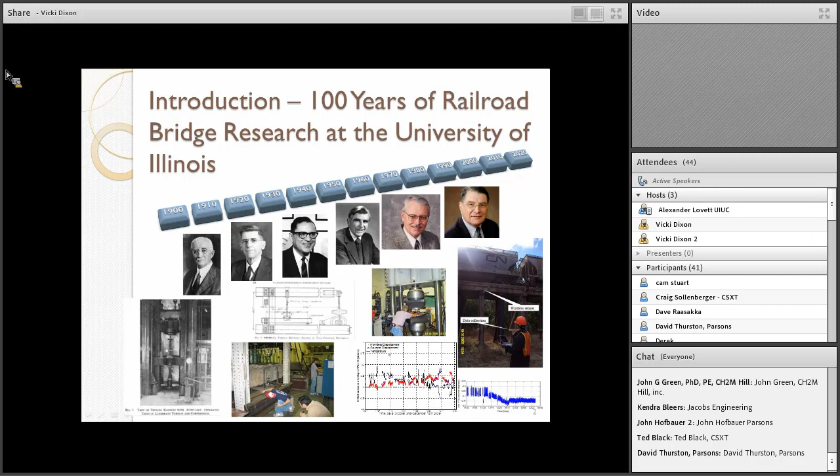Even today, we have a very strong group of 13 or 14 faculty in the structural engineering and mechanics program here at the University of Illinois in civil and environmental engineering, and probably half or more of these individuals have been directly involved in railroad research in one way or another. More broadly, the coursework and research they conduct may or may not always directly affect railroads and railroad bridges, but I think what students learn has many applications to that field.

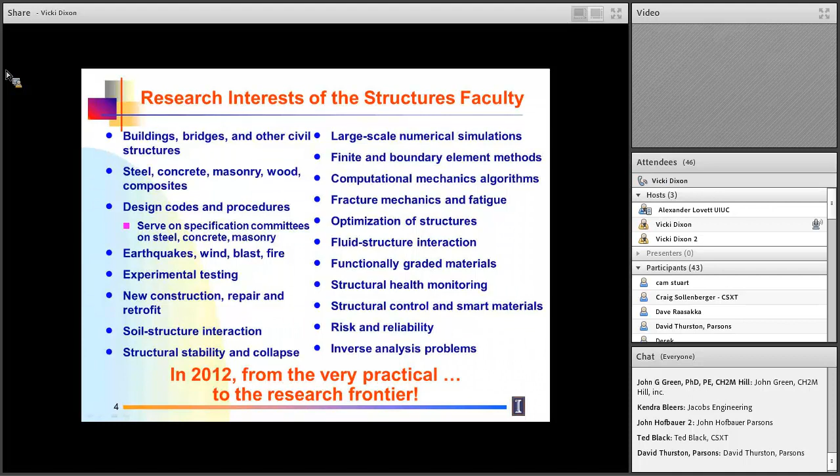So to briefly keep this tangent going, I wanted to give a quick listing of some broad research interests of our structural engineering and mechanics faculty here in the present day of 2012, ranging from the very practical, maybe in the upper left, things you've all heard of, to the research frontier down in the lower right, where you hear about things like risk and reliability, structural health monitoring, fancy new materials that are emerging, et cetera.

So to complete this introduction related to structural engineering here at Illinois and how it has connected to the railroad engineering program and railroad-related research, I'm just listing here a handful of recent examples of UIUC CEE structures faculty having involvement in railroad-related research.

A few years ago, Professor Dan Kuchma, who's here in the audience today, did some testing for strength evaluation of aging concrete railroad deck beams. Right now, Professor Larry Fahnestock is involved in a project on improved bolted connections for special trackwork with a focus on crossing diamonds. Professor Bill Spencer is here as well, and has great expertise in wireless structural health monitoring, with a particular example being the so-called government bridge.

Professor Bassem Andrawes, along with Dan Kuchma, is working with a big team on improved concrete railroad tie design and performance. And then I'm going to talk a little bit today about one narrow slice of bridge performance assessment using simplified field monitoring. That is in addition to some construction materials and other faculty working on topics closely related to railroad bridges and closely aligned with structural engineering—John Popovics and David Lange as well.

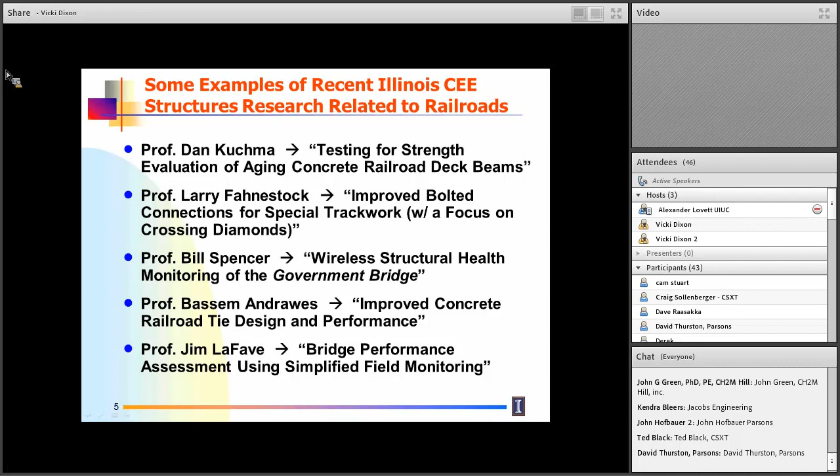So in terms of the slightly more narrow focus topic for today, bridge performance assessment using simplified field monitoring, the general background is that there's an ongoing need for repair and replacement of railroad bridges, and there's an issue that there's limited access to them during actual traffic, so it may be challenging to measure year-to-year degradation.

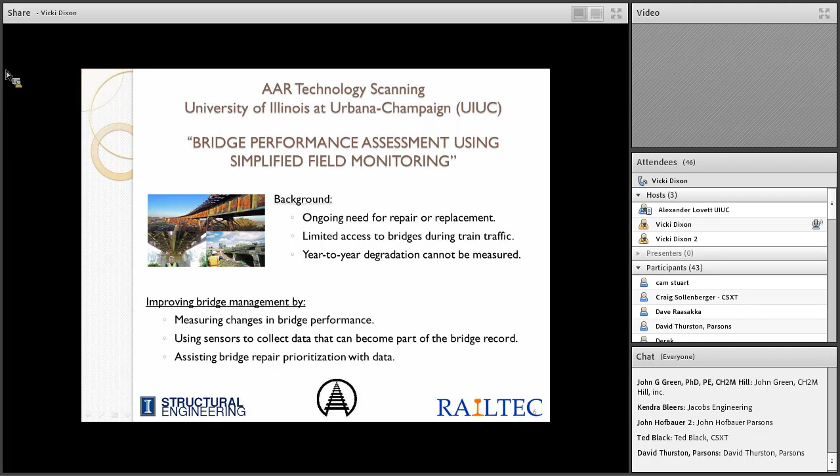Perhaps bridge management could be improved by measuring changes in bridge performance using some sort of sensors, wired or maybe even ultimately wireless, to collect data that can become part of the bridge record that could assist in some way in bridge repair prioritization under the general umbrella idea of performance assessment for maintenance.

So what I want to talk about today is, first of all, for a few minutes, some important preliminary work that was done to get a better handle on research needs within the railroad industry related to bridges and structures in general. After that, I'll briefly talk about the monitoring approach.

One field excursion where on a timber trestle some displacement measurements were made with the help of folks from CN, and also some acceleration measurements were made, and in tandem, as I indicated earlier, some folks from the Smart Structures Technology Lab here also were making wireless measurements. I'll try to describe in general what that research has shown to date and where it might go from there.

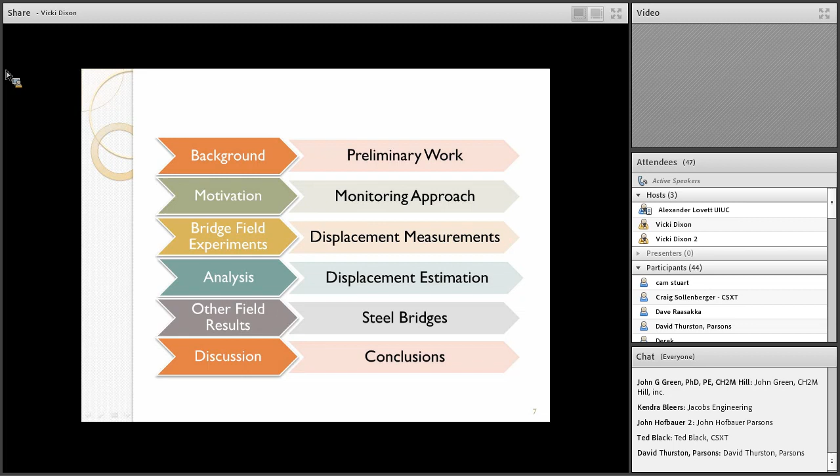So in terms of the preliminary work, there's two things I want to talk about. One is a survey-based study that was conducted over the last couple years, and then the second is an ongoing effort toward what I call railroad bridge classification.

The survey-based study was basically something conducted over roughly the last couple of years to try to determine, for railroad structural engineering, what are the current research needs. The effort was focused here at the University of Illinois. I mentioned Fernando earlier—he and I spearheaded it, with him doing most of the legwork, and the goal was to determine current research interests and needs related specifically to railroad bridges and then more broadly to structural engineering in general.

The motivation for doing this was that about 25 years ago there had been a national workshop on a related topic held right here on campus that resulted in a white paper type document identifying the most important research topics of that day regarding railroad bridges and structural engineering. Many folks have noted that the amount of related research activity in the era leading up to then was trailing off with respect to railroad bridges, and it picked up a bit in the era after that.

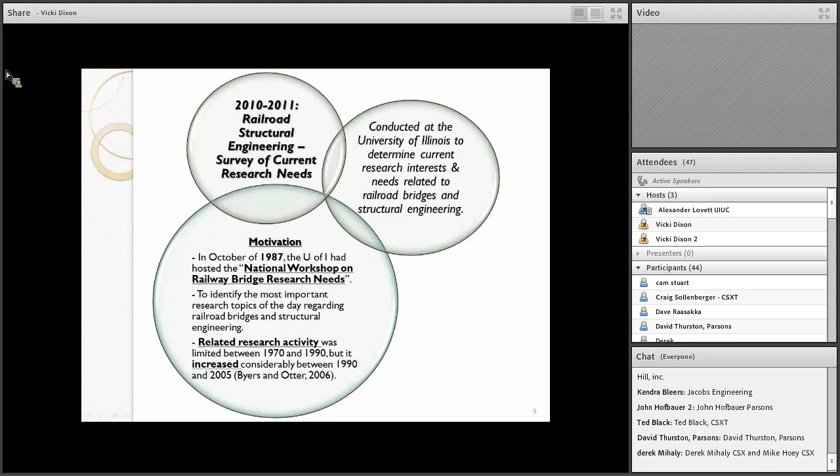So the idea was that as a minimum objective, if one could conduct some version of a survey that might be a surrogate for an actual workshop, it could help prioritize the current railroad bridge structural engineering research topics as given by members of the community across North America. Since it had been quite some time since the previous survey or workshop, this could be very beneficial to the profession.

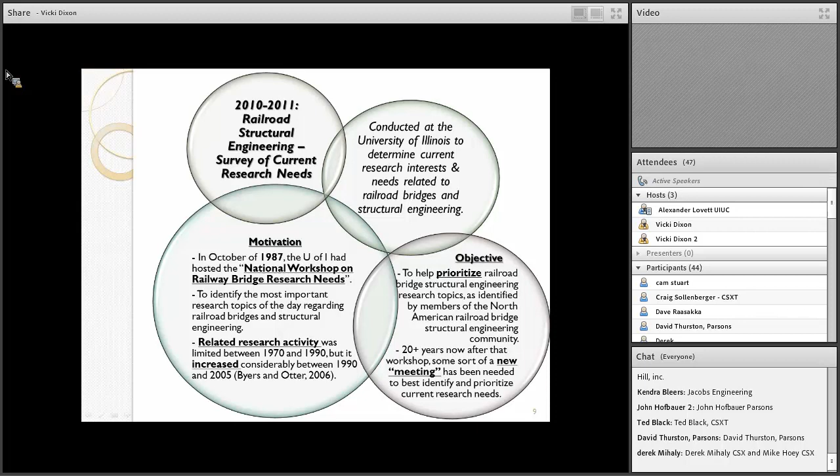In terms of the survey methodology, just to give a brief idea of what was done: the project started with Fernando and me talking to various people in the industry to come up with appropriate open-ended questions to ask, and also topics to survey about.

These were emailed to various interviewees with questions and topics, followed up with phone interviews. Along the way, some additional topics were added to the initial list, interviews were continued, and follow-ups were completed with folks who had been talked to early in the process before the full list of topics was complete. Finally, there were meetings in person, if possible, to discuss matters further.

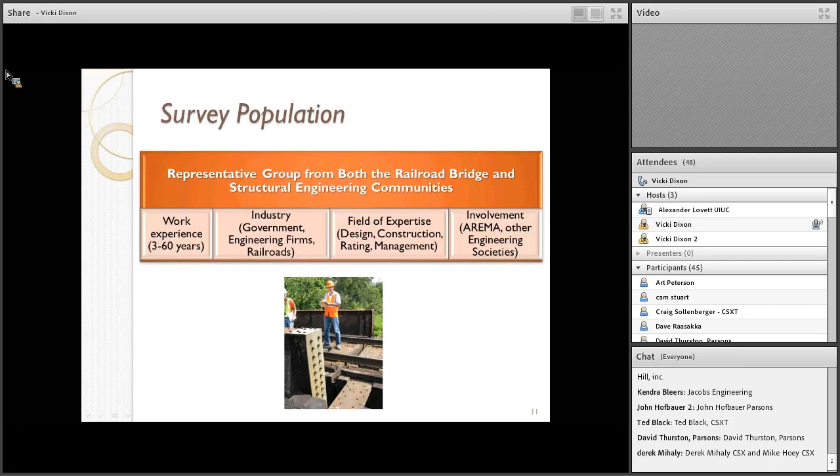On the side, some literature reviews, meetings with other experts, etc., were also conducted. In terms of the population, this was not a large survey in total number of people—it was targeted at something on the order of 16 primary participants, but they represented a wide range of experience in the railroad industry, representation of different organizations related to the railroad industry, fields of expertise, and other professional committee involvements.

What came out of this survey were 22 main research topics, including topics originally proposed by us when we started the survey, some new topics collected along the way, and a handful more from the related literature review. All of this can be found in a Newmark Structural Engineering Laboratory Report Series document dated just last month that goes into great detail summarizing all aspects of this survey.

Even though there were 22 main topics collected, about half a dozen of them seemed to be the current top research topics from the overall survey. Those were also summarized in more cursory form in a short RT&S magazine article published roughly a year ago.

So out of the current survey from the last couple of years: some means to make accurate deflection measurements on in-service railroad bridges, along with concerns about high-speed train effects on bridges and structures, long-span bridges that might be needed to replace existing aging bridges over major river crossings, issues about approaches both from the bridge and non-bridge perspective, longitudinal force issues, and concerns about new design loads.

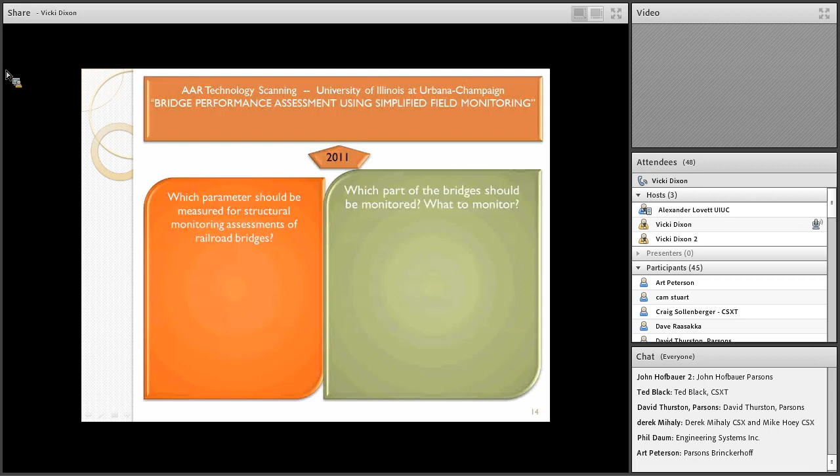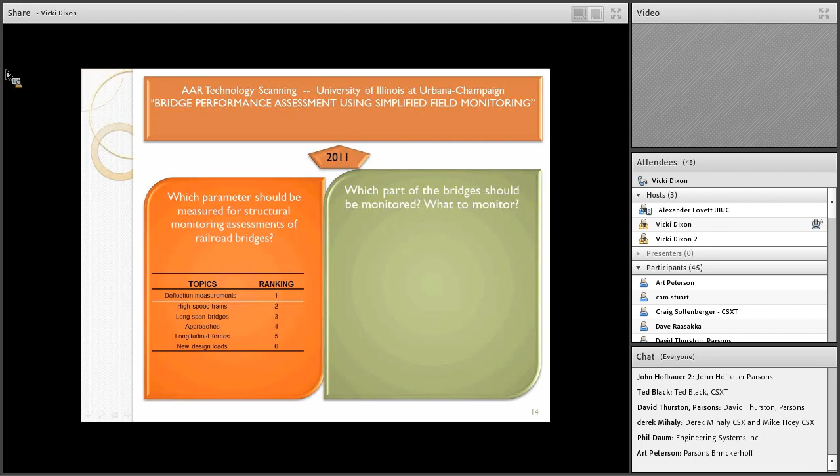So with the survey sort of in place and in mind, the thinking going forward is that one parameter that might be of interest to folks in the railroad field with respect to assessing or monitoring bridge structures could be lateral deflection. That focused the ongoing research a little bit further.

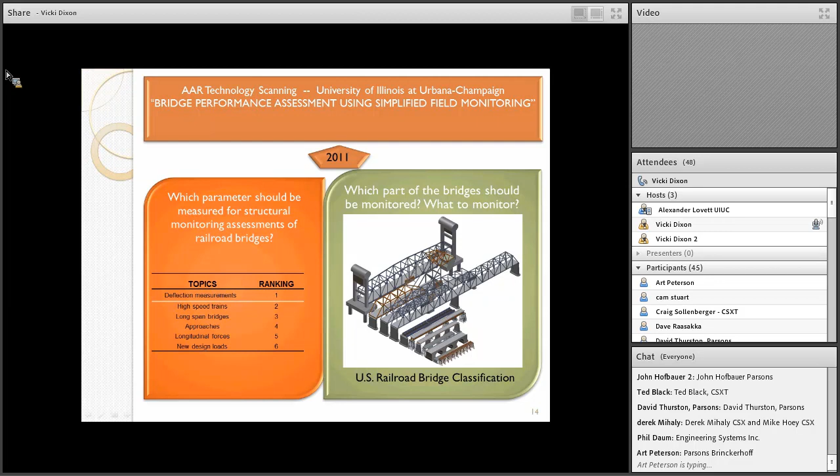Along the way, one other activity I want to briefly describe was also conducted: an effort to create a bridge classification of typical railroad bridges in North America, to better understand the full collection of bridges, and to get traction toward understanding what part of bridges should be monitored depending on bridge type.

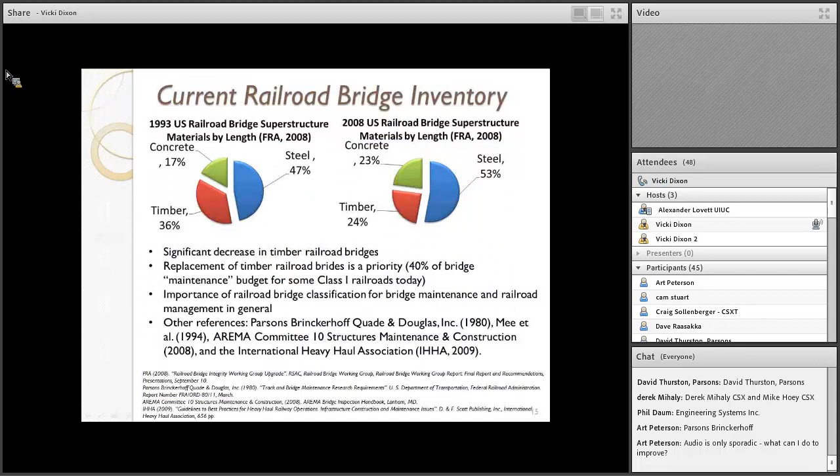This is pretty much still a work in progress, but it's being done in conjunction with railroad bridge inventory. The idea is that among the main classes of railroad bridges—timber, concrete, and steel—there could be as many as 11 different frequently occurring categories based on the superstructure and other aspects.

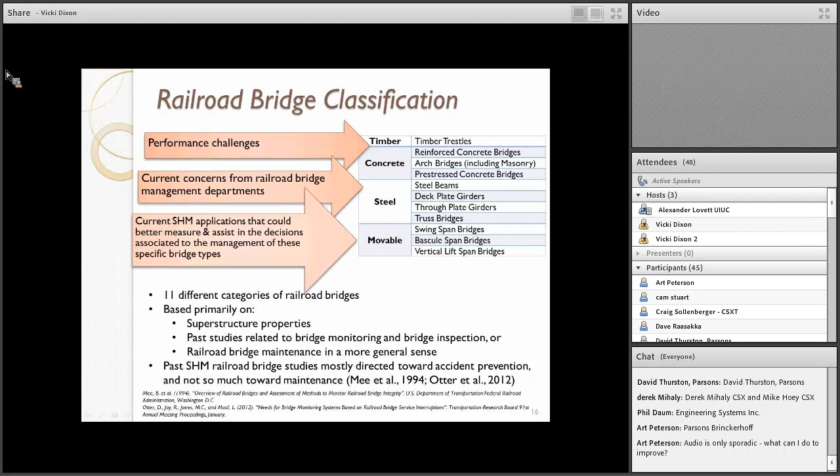There may be various performance challenges or concerns in the industry about different bridges that are specific based on classification type. Many structural health monitoring applications so far are directed to certain subcategories of these bridges, or in some cases directed toward accident prevention and not so much toward maintenance or routine inspection operations.

Out of this came a set of classifications that aren't completely complete, but you can see an example here. This was conducted also in part in conjunction with the AREMA Committee 10. The graduate student involved, Fernando Moreu, is a member of that committee, and a lot of this classification information was run by members of that committee.

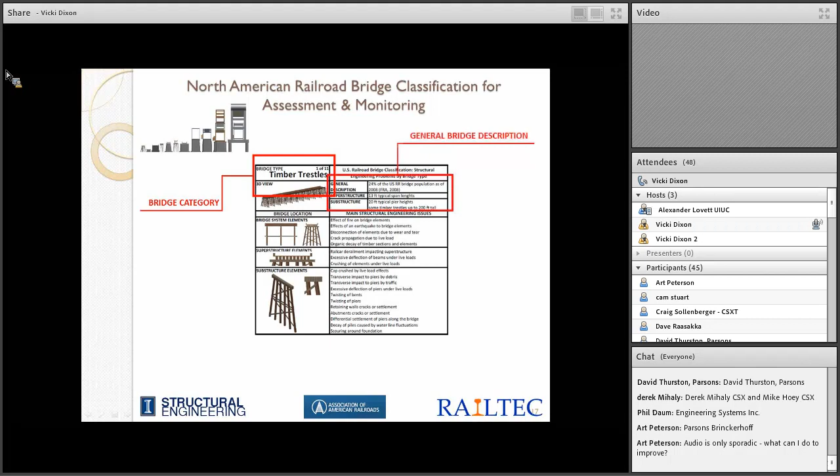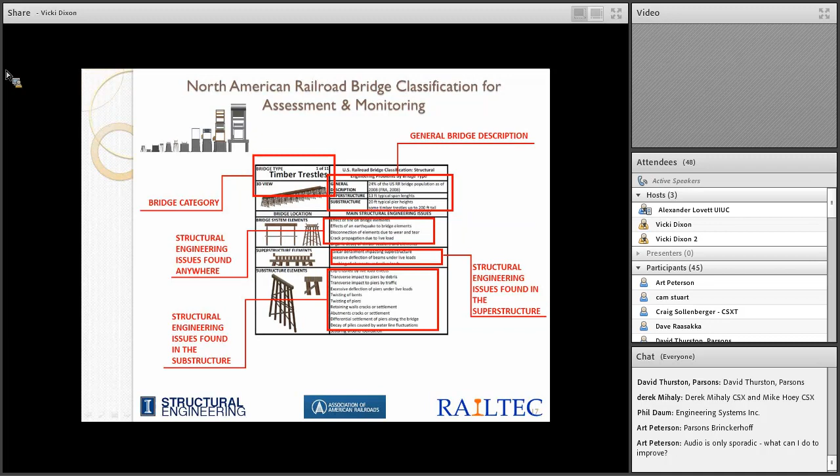Examples of what we're doing for each of the 11 categories is to define what this class of bridge is in terms of a general description, and what are some of the most basic structural engineering issues that occur for that type of bridge, particularly for its superstructure and substructure—in hopes that once we complete this effort and make it available, it could be helpful to those in the field interested in bridge assessment, monitoring, and the like. So we're doing this for a whole group of different typical bridge classes.

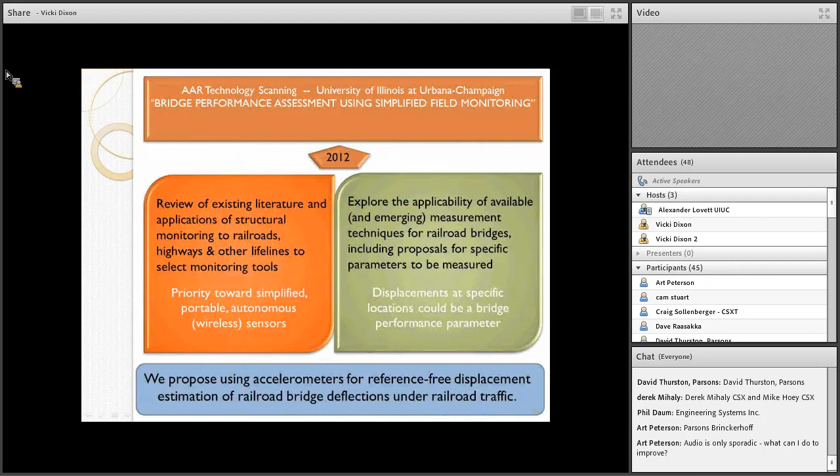So then the next step I want to talk about today in bridge performance assessment using simplified field monitoring is to say that, based on a survey-based study, there's interest in measuring deformations or displacements. If that's important for railroad bridges, then perhaps we can explore the applicability of available measurement techniques or emerging ones to estimate these displacements.

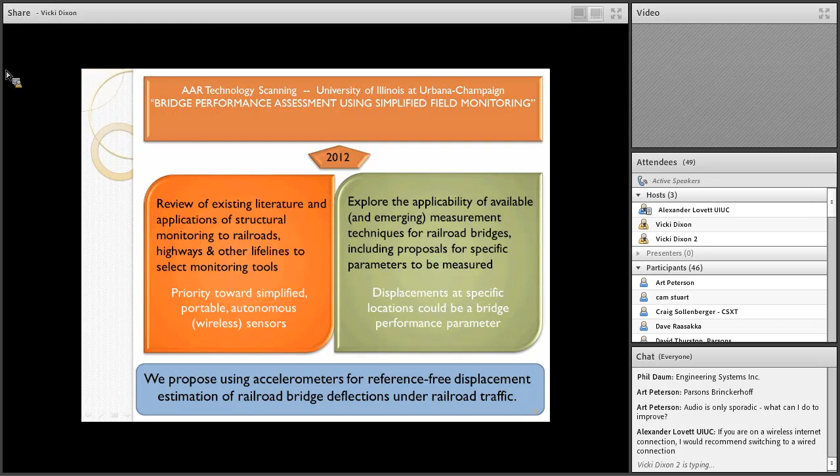Displacements at specific locations could be a performance parameter of interest for certain classes of bridges in certain situations. So we proposed using accelerometers for reference-free displacement estimation of railroad bridge deflections under railroad traffic. As a train passes over a bridge structure, it creates vertical and perhaps lateral displacements, and measuring them may be a bit of a challenge.

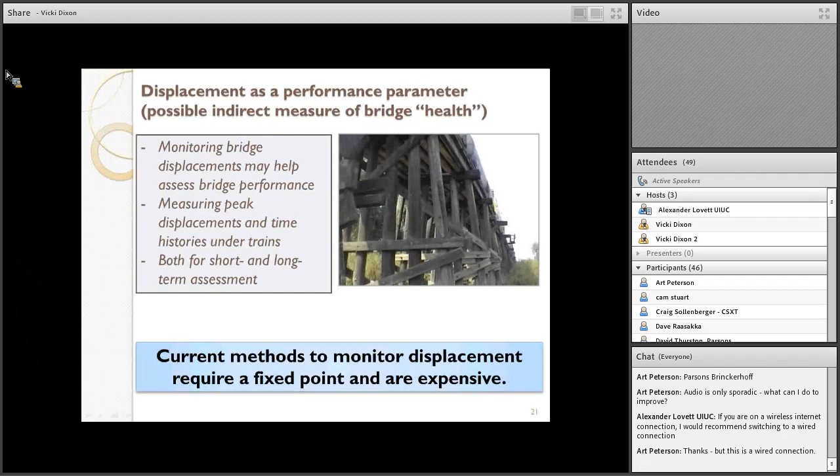If some traction could be gotten with respect to measuring peak displacements or time histories under trains for both short and long-term assessment, that could come in handy. Current methods are not particularly capable of monitoring displacements without a fixed reference point, which is always a challenge.

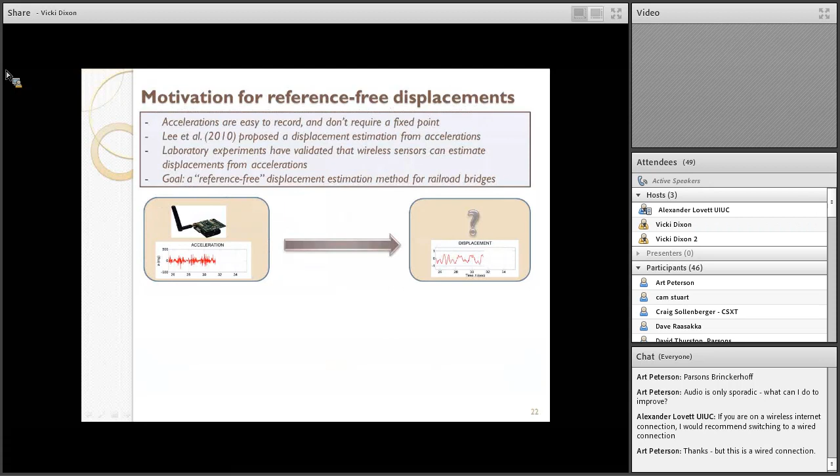With that in mind, as I already indicated earlier, there was a parallel motivation in this effort that maybe down the road it would lend itself well to measuring reference-free displacements using emerging sensor technology from the group of faculty led by Professor Bill Spencer here in the Smart Structures Technology Lab. Other recent studies had proposed displacement estimation from acceleration, so that's the direction we were headed.

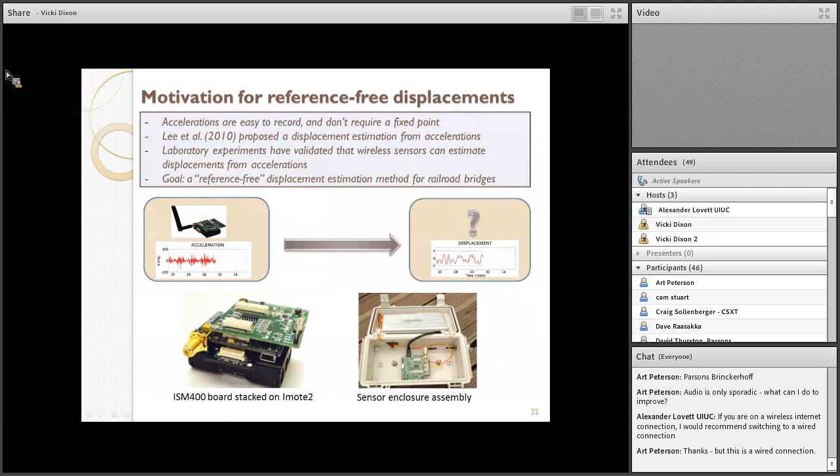So if we could use sensors to obtain reference-free displacement measurements of railroad bridges under actual live loads, then by doing some field experiments, maybe we could demonstrate the concept, and perhaps down the road it could be implemented with even fancier and emerging sensor technology.

Whereas if we wanted to have a robust field experiment, it would be best if we could actually have real LVDT displacement measurements to compare against, to compare our actual train displacements with those that we could estimate.

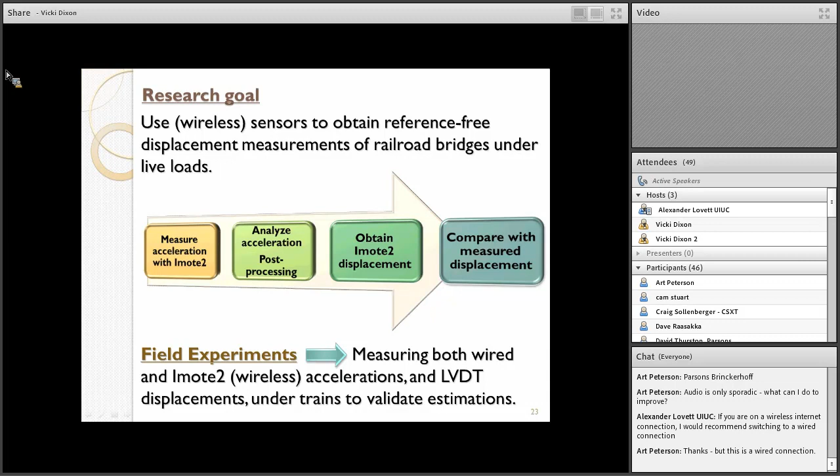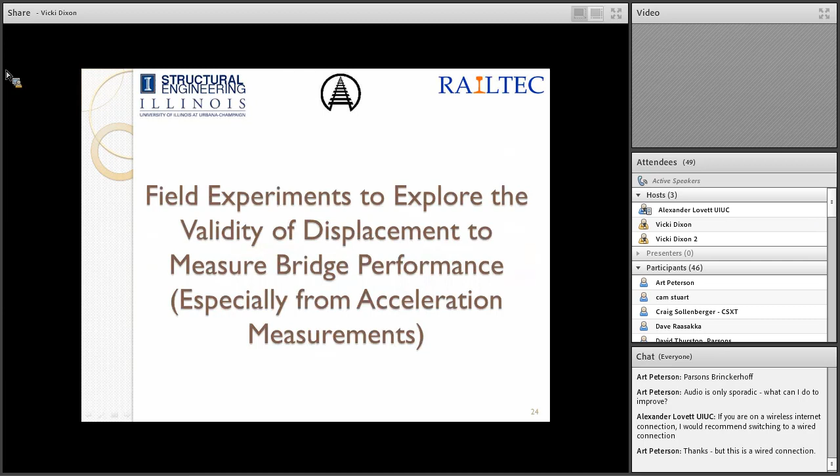So what I want to describe in the last part of the presentation is a little bit about some field experiments that were conducted to explore the validity of displacement as a measure of bridge performance, especially from acceleration measurements.

What came up was there were some perishable opportunities that occurred where, in conjunction with Class 1 railroads, some nearby bridges for potential testbed sensing implementation were determined in conjunction with both CN and BNSF. I'll primarily talk about just one CN timber trestle bridge here today. These were targeted to try and integrate some of the most pressing problems with the railroad with the work we were doing here in the department.

So there were 3 different field monitoring campaigns that have been conducted so far: one on a CN timber trestle down near Edgewood, Illinois, and then 2 more that were conducted near Burlington, Iowa, where an old BNSF steel pin truss and a new BNSF bridge both happened to temporarily have pier access to make reference displacements to compare to reference displacement estimations.

In each of these cases, the graduate student I described, Fernando Moreu, along with assistance from Professor Spencer's group and graduate students and postdocs, paid visits to the site.

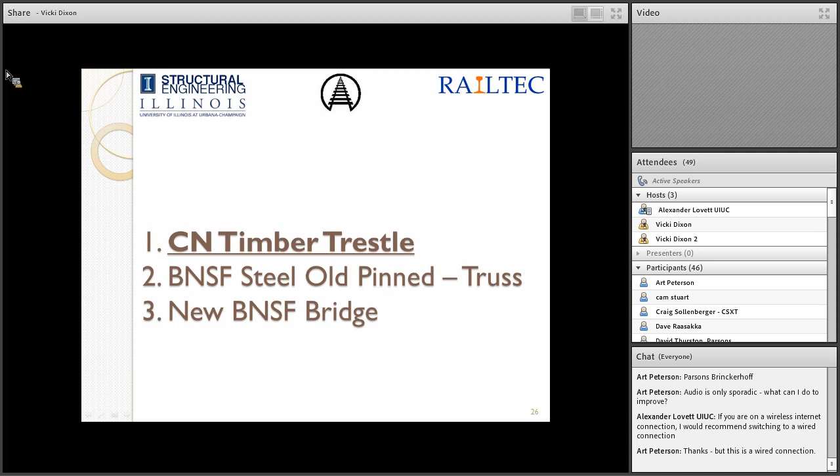In the case of the CN timber trestle, there was also a lot of help from CN in terms of establishing, through Sandro Scola and also Hoat Le, a reference scaffold so that we could make actual displacement measurements. They also gave us access to their wired LVDT and accelerometer data that I'm going to mainly be presenting here today, and assisted in many other ways. We're very thankful for that help from the railroad.

In terms of the experimental setup at this first case, it was primarily at one south trestle, immediately adjacent to the main span, which was a steel span. The instrumentation included 2 LVDTs from CN measuring vertical and horizontal displacements with respect to a reference scaffold that had been included. We also had from CN some wired biaxial accelerometer information, and as I indicated, there were also some additional wireless sensors brought to the site by others at the U of I to compare and contrast readings later on. Measurements were made on 10 work trains and 4 regular trains.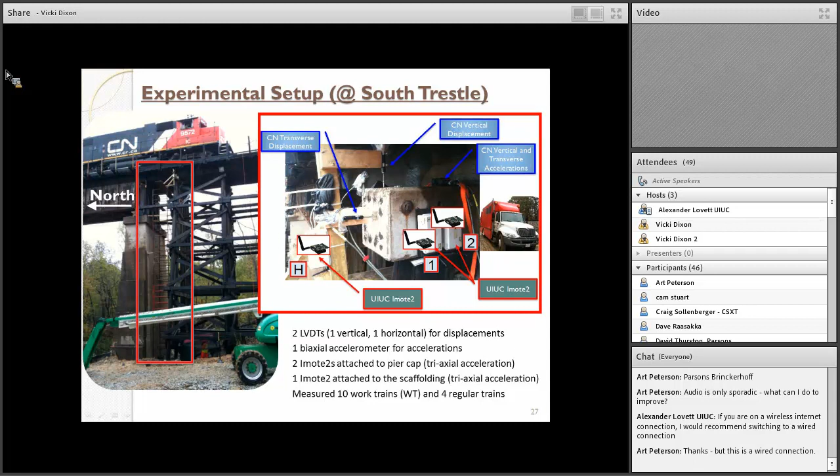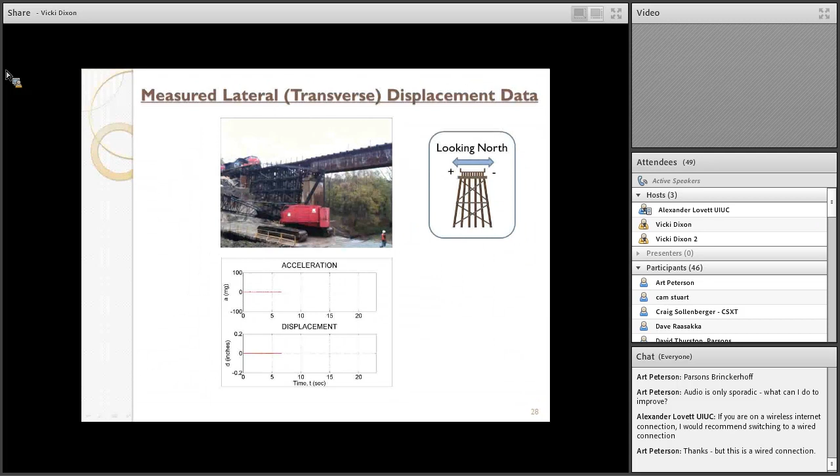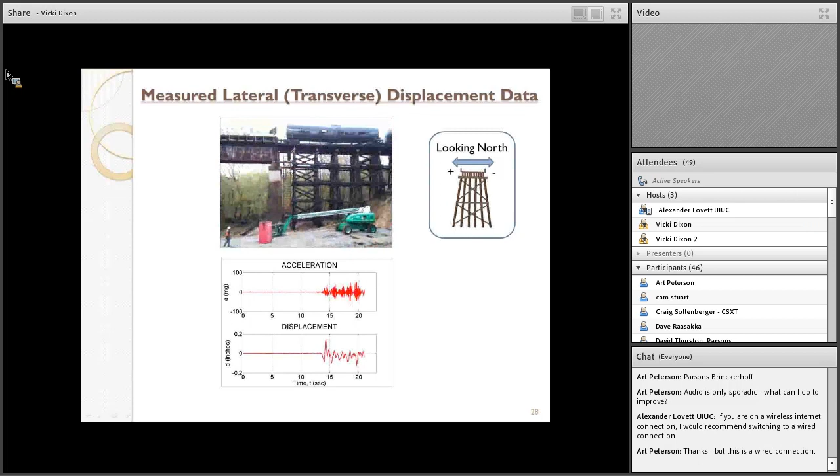This is just a video showing not one of the work trains, but one of the regular trains passing over, showing the direct measurements of acceleration and displacement as it passed over the first timber trestle in question. This is the lateral displacement and acceleration data obtained via the CN group that was assisting us.

In terms of the work trains, we ended up having, as I indicated, 10 of them. They were run at speeds of 5 through 25 miles an hour in each of the 2 primary directions, over and back. This bridge just had 1 track on it, so there was no effect of one track versus the other.

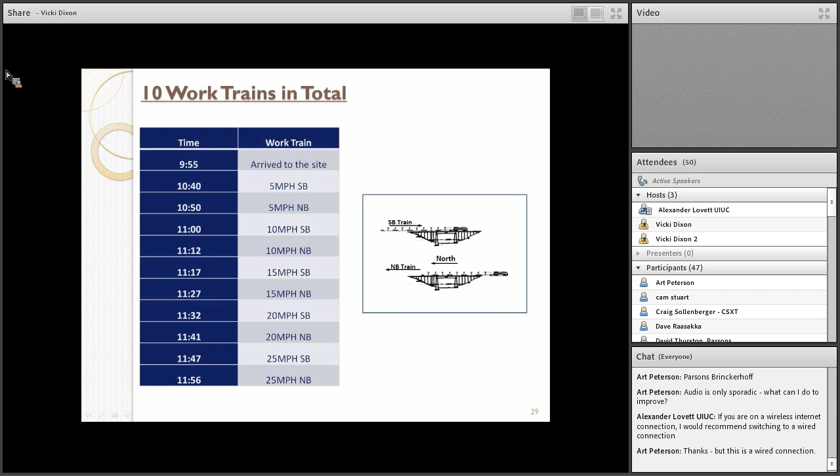The measured displacements on the left are for vertical displacement from the actual LVDTs at the site provided by CN, and on the right are the transverse displacements that were collected as well. You can see that the vertical displacements indicate very regular response with axle loads passing over the actual trestle being instrumented. These displacements are in millimeters; pretty much everything else is in inches, so I apologize for that small difference. There's also been a normalization done here to get a common time scale across all of the different speeds of trains passing over this particular structure.

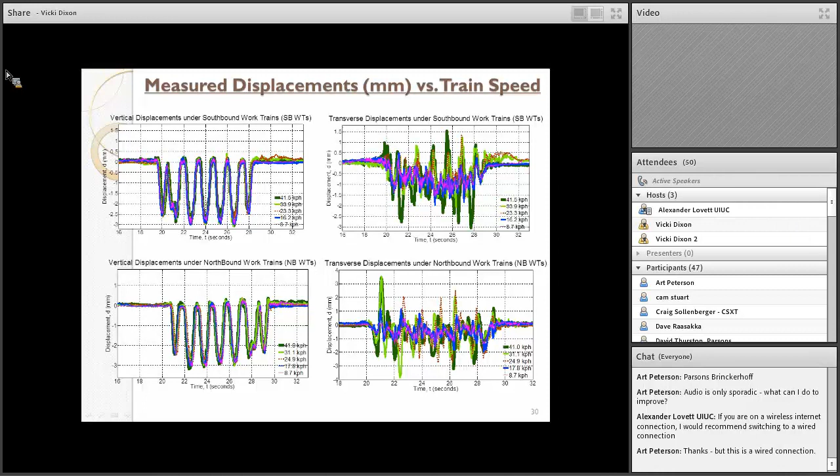It's referenced to the time scale that was actually in place for the fastest of the trains, the 25-mile-an-hour case. On the right, you can see that the transverse displacement information is much less regular, much more messy, but for this point in time, I just wanted to present in general what it looks like.

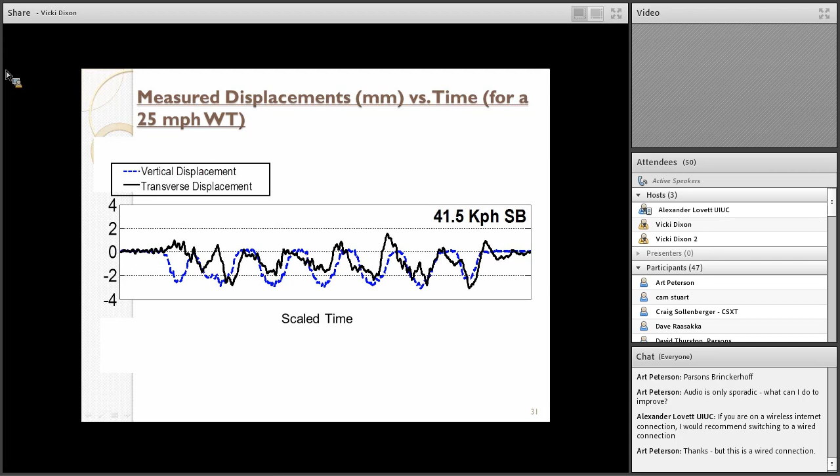A specific example of these measured displacements versus time of the trestle, both vertically and horizontally, is shown here for one particular work train passing over the trestle. You can see the vertical displacement in the dashed blue line is very regular as the axles pass over this trestle, whereas the transverse displacement is a little more complex. Even the transverse displacement has a modest pseudostatic trend in the negative direction, favoring one side versus the other in terms of how it was displacing under load, in this case under a southbound work train.

In terms of the maximum displacements that were measured, taken from the wired sensors put on in conjunction with CN, we can make some very simple observations to get started, even though the main effort here is ultimately to come up with some reference-free displacement measurements. We thought it best to, as an intermediate step, just understand what was coming from even the direct displacement measurements that we were able to make.

The findings were that in general, the vertical displacements are fairly independent of train speed over this range of speeds. The horizontal displacements, on the other hand, increase with train speed. And then the train response when over the bridge is often said to be controllable with slow orders, and this would indicate that that would appear to control the lateral but not the vertical performance of timber pile bents.

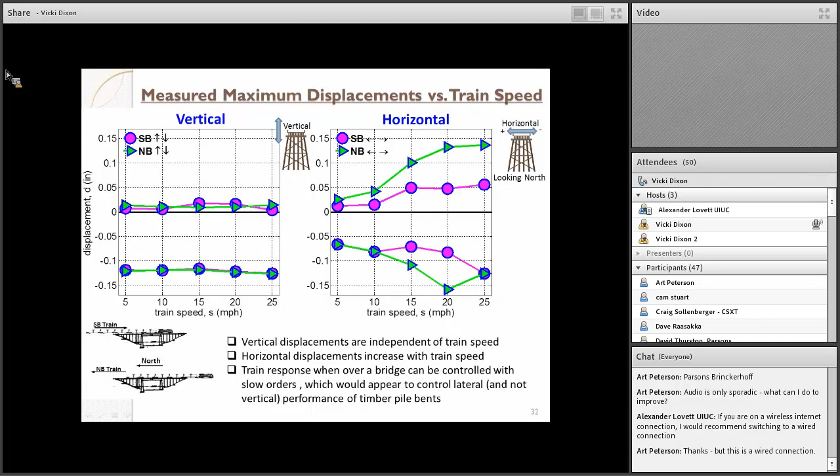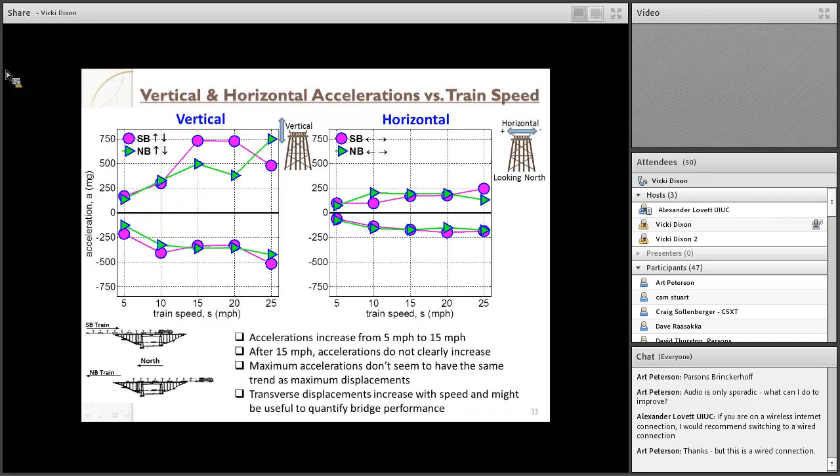Probably nothing too terribly surprising in that finding. As far as the vertical and horizontal accelerations versus train speed, this is simply a plot of maximum values in the two directions. You saw what the actual signals look like a little bit earlier. The accelerations tend to increase from 5 to 15 miles per hour, and after that don't clearly increase as much. Maximum accelerations didn't seem to have the same trend as maximum displacements, and if transverse displacements increase with speed, some more information about transverse displacement could be useful to quantify bridge performance in some limited situations.

Shifting gears, the next step was to see on a first cut what could be obtained from the wired acceleration information from CN at the site, in terms of how it might predict any or all aspects of the measured displacements obtained there. What was found is we could estimate displacement simply by double integrating the measured acceleration and then comparing to the measured displacement for validation.

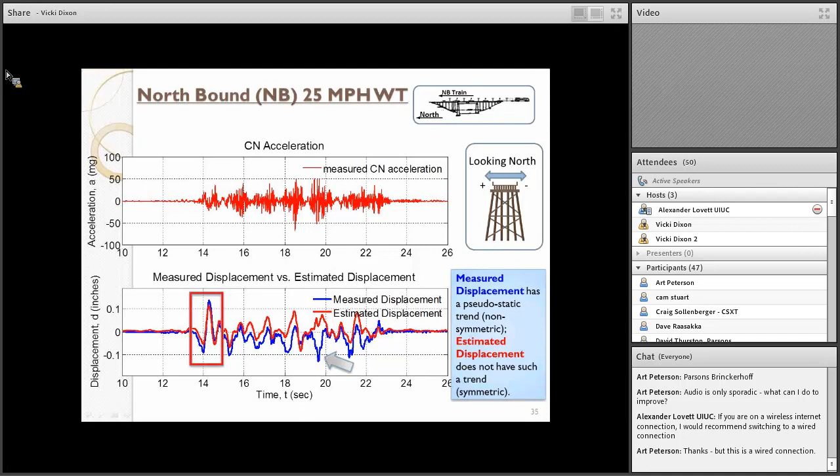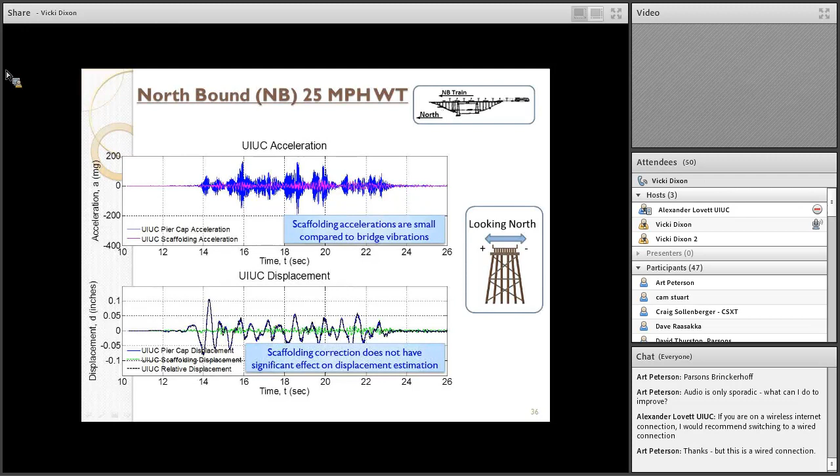In terms of another example, the wireless accelerations obtained using equipment from the Smart Structures Technology Lab were also used, and they were attached not only to the top of the timber trestle but also to the scaffolding. One could use the same procedures to try to estimate from the scaffolding accelerations whether scaffolding displacement was significant. It was determined that while there were some scaffolding displacements, and while those could be corrected for, the scaffolding correction did not really have a significant effect on the overall displacement estimation.

We can also compare the displacements that are measured to various lateral displacements, as I've already indicated, from the CN group I've already described, and then superimpose on that the ones from the wireless sensors brought to the site here as well. The measured lateral displacement, as I said, is non-symmetric. The maximum values and ranges of lateral movement are fairly well estimated, but the wireless sensors do appear that they can estimate displacements from a standpoint of both their maximum value and perhaps also their range.

The measured pseudostatic trend could also, as an attempt, be removed by detrending measured displacements to see how, if it was a zero mean, it would match up to these calculated displacements. That's done here, and the results indicate that the estimated displacements versus the detrended measured displacements match up quite well. Now, in reality, what was really needed is not a way to detrend the actual displacements to get to the estimated calculated ones, but rather a way to trend the estimated calculated ones to get them to look like the actual full real measured displacement record.

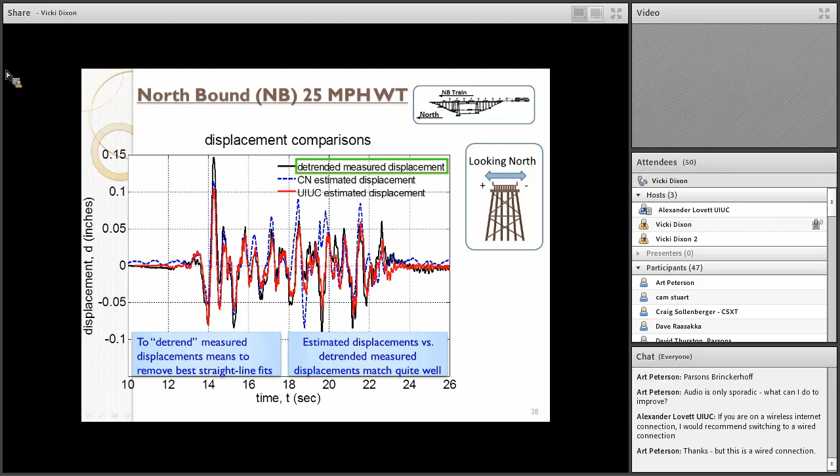That's one of the future challenges, unless the only interest is in dynamic range, in which case what's being done might be sufficient in certain cases. Looking at the total range of displacement estimation, the maximum peak-to-peak displacements, note that except for an anomaly appearing with the 20-mile-an-hour train, the displacement range estimates seem to improve with higher velocities, on a percentage basis at least, and the pseudostatic component definitely appears to affect the accuracy of these lateral displacement range estimations.

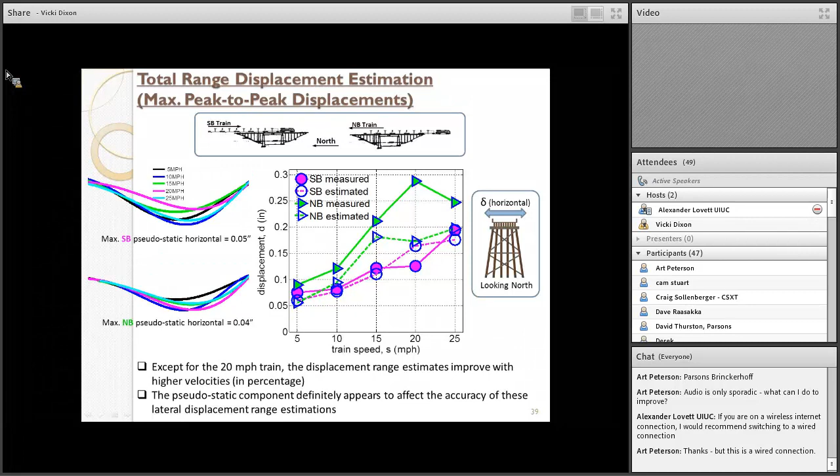As a final step, because there were additional accelerometers only on Pier 2 and Pier 3, but no displacement measurements, this information, also from CN, was able to be used, and following the same procedures, could be used to estimate deformations of Piers 2 and 3. Incidentally, of Piers 1, 2, and 3, Pier 1 is the one I've been talking about most of the time. Piers 2 and 3 are a number of piers away from that, farther from both the end support and the main middle long span.

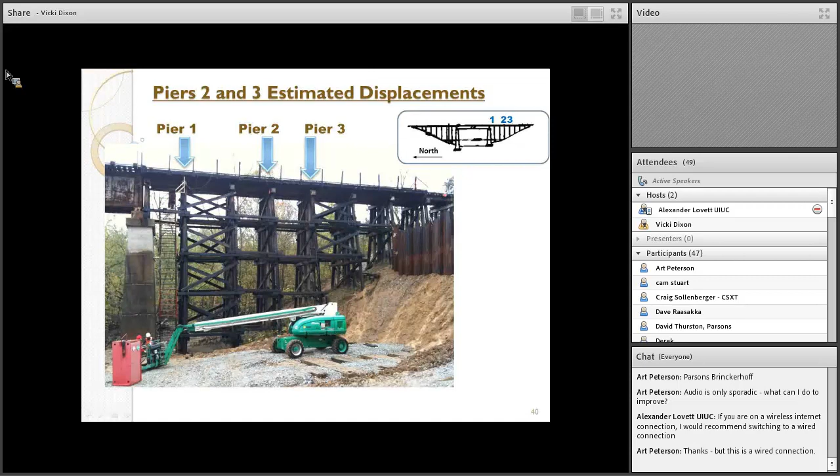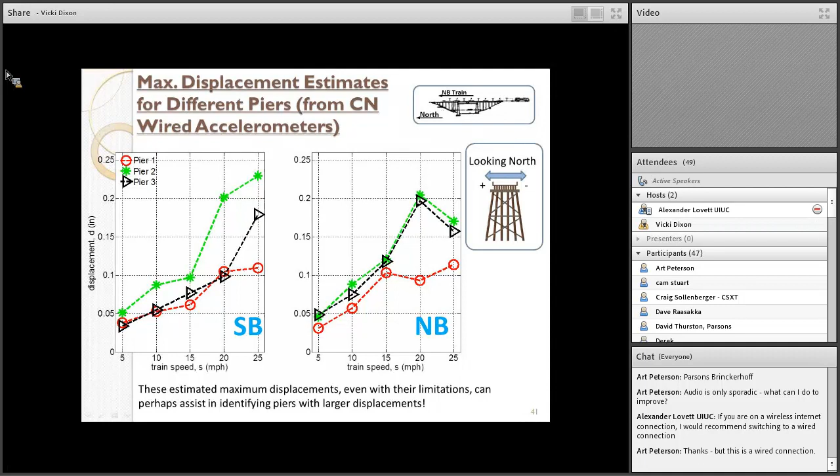In terms of what was found, the maximum displacement estimates for the different piers are shown here, simply using the CN wired accelerometer values and double integrating. Although this is fraught with all the limitations I've already mentioned, basic information about estimated maximum displacements, even with those limitations, may be able to assist in identifying piers with larger displacements in a very quick and efficient fashion.

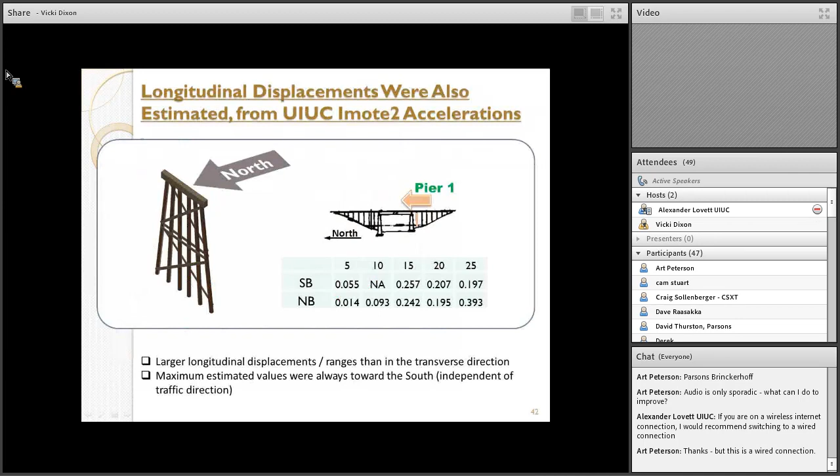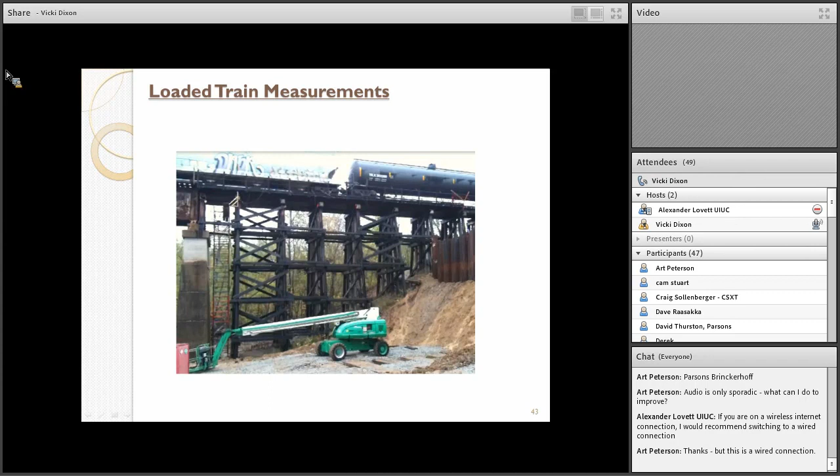Additional information about longitudinal displacements using the same procedures could be determined as well. As far as everything I've talked about so far, it's been related to work trains passing over this timber trestle structure, but measurements were also made in terms of actual LVDT displacements and actual accelerations for loaded trains. So that information can be presented here next.

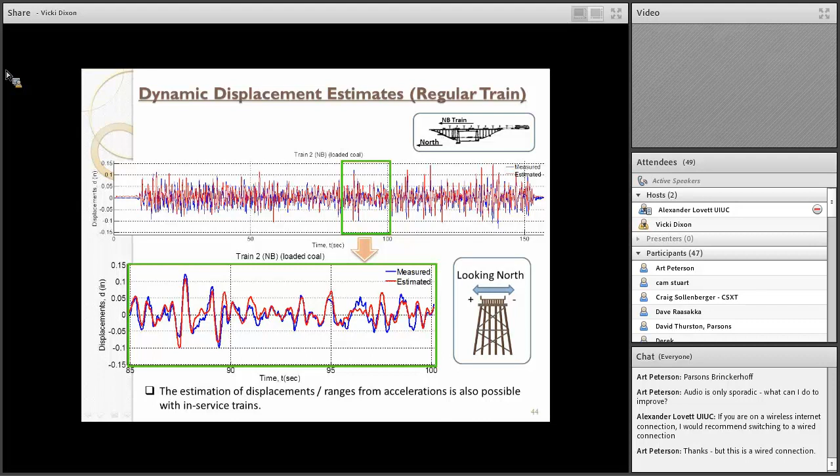What you see here then is some dynamic displacement estimates for a regular train. Obviously the signal is a lot longer and more complex, but once again the estimation of displacements shown in the lower figure, from ranges of accelerations, is also possible with in-service trains. Now, if this was a vertical example, it would only be catching the dynamic part and not the pseudostatic part, and similarly, in terms of the transverse behavior, that aspect is, for the time being, missing in this assessment as well.

So in terms of a quick summary and conclusions that I'd like to make for the talk here today, which covers a slice of some research that's ongoing in various ways going forward: first, the ability to make reference-free displacement measurements could be a promising contribution to an existing railroad bridge structural engineering research need, as seen from the survey of structural engineering and other professionals in the industry.

For the timber trestle measured under work trains, lateral displacements increased with speed. Displacements have been estimated from accelerations using the wired sensors from CN in each case, with comparable results for the dynamic range of both work trains and in-service trains.

Some other results from a 250-foot steel truss in Burlington, Iowa, both an old and a new one that I'm not presenting here today, also indicated some good promise for this general procedure using, again, wired and I believe also wireless accelerometers.

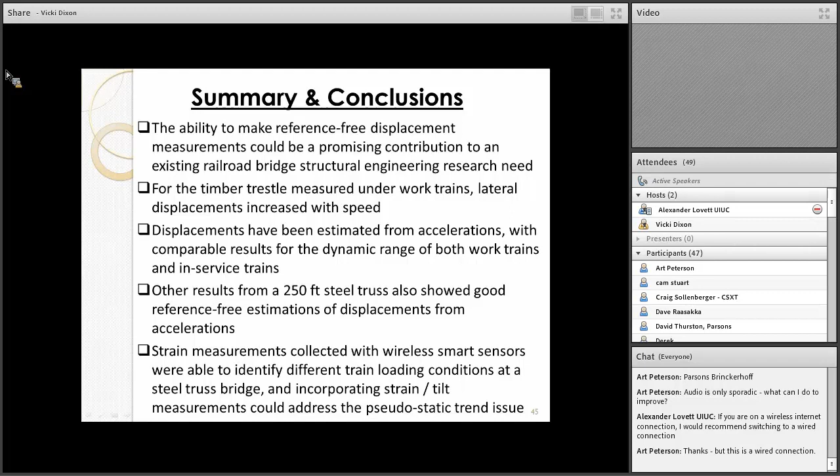Finally, other measures, perhaps strain measurements, perhaps tilt measurements, etc., might be able to, in conjunction with models of these structures, be used to address this pseudostatic trend issue that I've noted here today. And there could be other emerging technologies in the future, things related to laser scanning, GPS, etc., that as they continue to mature may be complete alternatives to what's being described today.

So finally, in terms of acknowledgments, I've already given a quick acknowledgement to many of the participants from the railroads and the other laboratories and facilities, but I wanted to once again indicate that Graduate Research Assistant Fernando Moreo is the main driver for most of what I've talked about today. CN helped a lot, with Hote Lee, Sandro, et al. helping us at the site. The Smart Structures Technology Lab, Professor Bill Spencer, his postdocs and graduate students, helped with the wireless sensing portion that I didn't emphasize today, but was also part of this and in some of the processing of the information. And finally, the AAR tech scanning program, and Dave Davis was the initial impetus for doing this work in the first place.

So with that, I'd like to wrap it up, and I'm glad to try to answer any questions. I think our leading expert on this, Fernando, is off taking his Chinese class right now and might be back in a few minutes, and he can probably even answer some of the questions better than I can. So thank you for your attention.